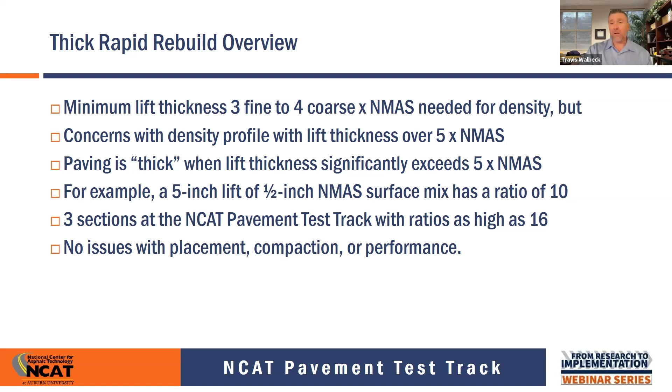Back in 2018, there were 3 sections built on the NCAT test track with ratios as high as 16. South Carolina DOT had come to NCAT wanting to look at this technology and the ability to do thick lift paving. Could they get the density they needed? Could they get the smoothness they needed? We did some different things between diamond grinding and thin lift overlays with them, and put those sections together. Through that work, we found there were really no big issues with the placement or compaction, and definitely not the performance, because they lasted long enough that they continued traffic into the '21 cycle.

So as we look at what was done out there, we had 6 to 8 inches that were placed as a single lift on top of a crushed aggregate base. There was a deep mill and fine mill at intersections.

To simulate what was going on, they used the South Carolina B mix, which is what we used at the NCAT test track here, and we used the local aggregates for that.

We did some trials off the track, certainly trying to see what we could come up with up in the parking lot area, if you've been to the track, to make sure that we were able to get the density and so forth that we needed.

So then a couple of things that were explored were the diamond grinding to make sure we got this new smoothness, and some thin lift overlays.

So we absolutely wanted to put out there that when this was first done, we had a tremendous amount of interest from the other track sponsors that were involved, and we've seen that interest continue to grow.

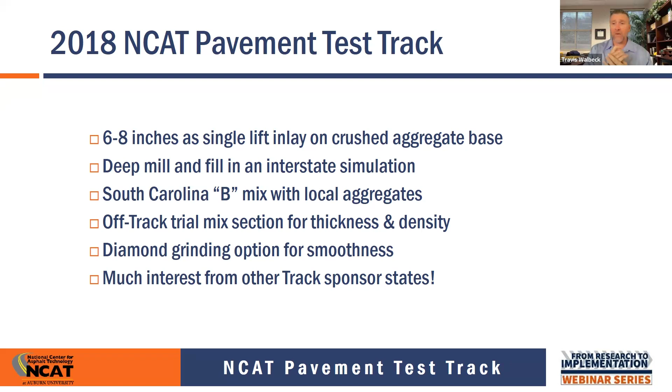I know that Utah picked up on some of those types of things. They tried these types of mixes. Asphalt Institute worked really strongly with them. They've got a ton of fantastic magazine articles out there that I read. I think Howard sent me those 3 or 4 years ago, he was sending me those articles. It was really fun to look at.

If you want to kind of know what the South Carolina B mix was, here's the idea. It was a half-inch mix, that 12.5 nominal maximum aggregate size. They used a 64-22 binder there with 25% RAP, and that would kind of be a half a grade bump for us here in Alabama, because we have that half grade here that we use, which is a PG 67 minus 22. So there is kind of a half a step down using that virgin liquid there.

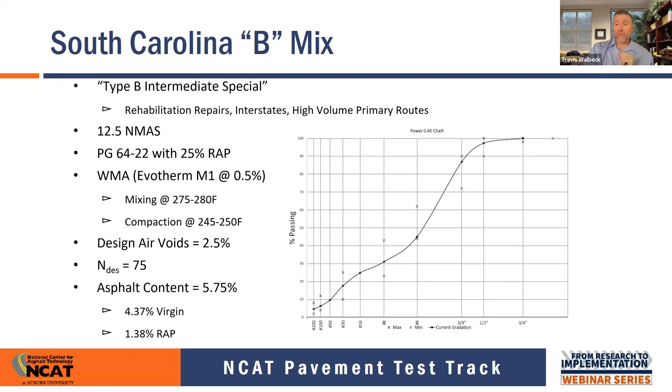There was Evotherm, the warm mix additive, used in that particular mixture. They were designing to 2.5% air voids, and I think when we hear from the Utah guys, they're going to tell us that they're using lower air voids as well. They used a gyration level of 75 on their mixture. The AC content was just shy of 6%. You can see the difference between what came from the virgin liquid there and what was part of the RAP.

So here is some photographs of what was being done on section S9 on the track, which is on our south tangent there. It was full depth rapid rebuild, they called it. It was about an 8-inch lift that was put down in a single pass.

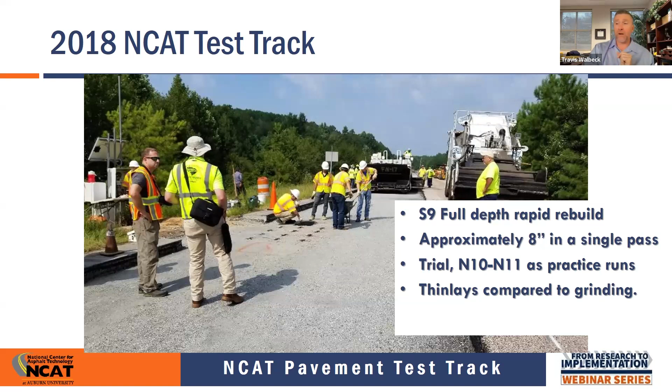Also trials were done on the north side of the track in sections 10 and 11 as practice runs. Really, they did that, but they put thin lays on top of it because they were really wanting to look at the thin lays and how those thin lays performed. But the thin lays definitely compared in smoothness, similar to the grinding that was done on the S9 section.

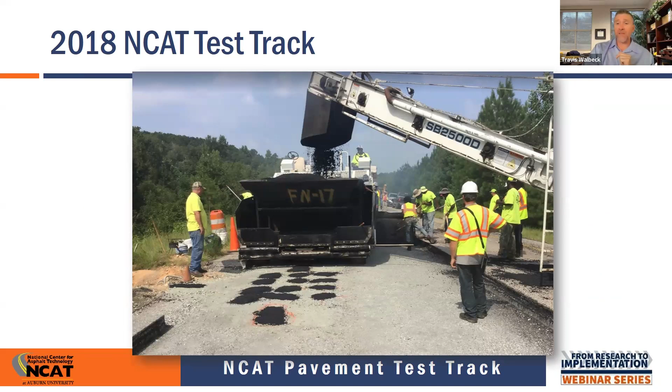So you can see the instrumentation has been placed there. Here's the paving operation. If you look just right to the right side of Jason Nelson's hip there, you can see how deep that milling is, that we are putting that mix down at 8 inches deep at that point.

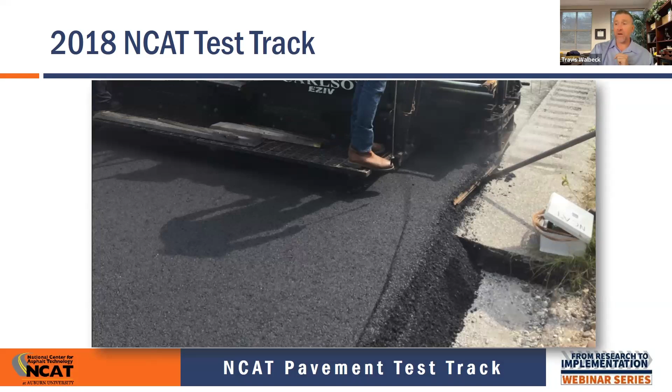You can kind of see here as it comes across the edge where they had to mill the shoulder out to make sure that it drained when we got our rains here. You can see how thick that asphalt was placed.

They did also do some things like wanting to watch the temperature. And I think we're going to hear from the folks in Utah that the temperatures are very important, because we have such a huge mass of material out there that it takes a tremendous amount of time for that to cool down.

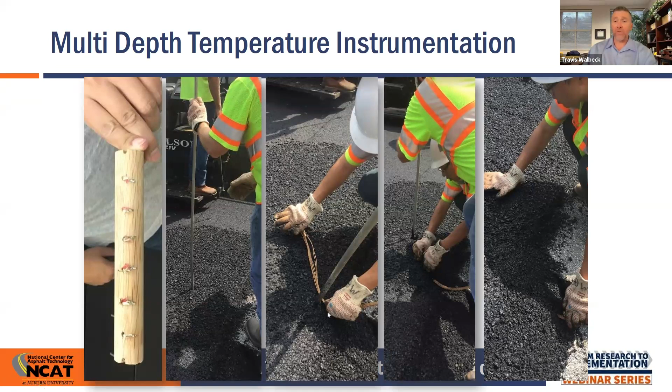So what Dr. Dave Timm did is put together this dowel that you can see on the left side with temperature probes at different levels. And then they crammed a rod down into the mix so that they could embed this temperature probe down in there and monitor the temperature at those different levels to see how the temperatures changed. And they definitely saw differences in the temperatures at the very surface and the bottom that cooled much quicker than the center of that big mass of material.

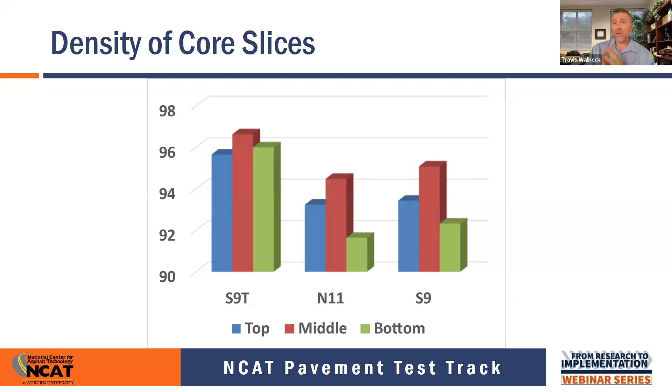So what we've had as this rule of thumb all these years is that you can't get density on the thick lifts. It's kind of been shown that that's not necessarily the case, and it is something that we can do.

So given that little overview of some of the things that South Carolina so graciously sponsored to be done on the NCAT test track, I want to turn the time over to Howard and Dave, and they can tell us about Utah's experience.

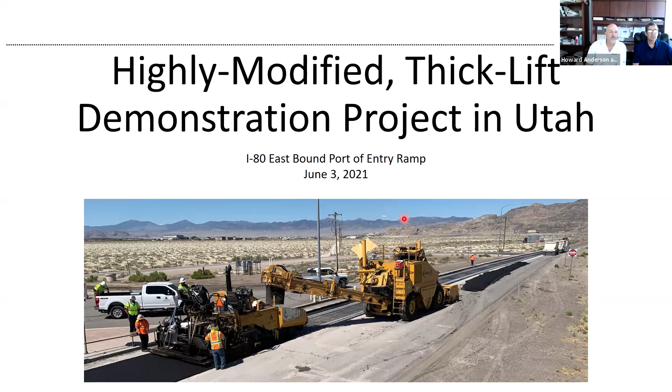All right, so as Howard said, this is the port of entry. We're looking into the state of Nevada from Utah at this particular location. As you can see, this was June of '21, so just a little over 3 years ago. We'll see some of the data coming up in a moment, but we're going to ignore the stuff on the left because Travis just gave a nice summary of it. We want to focus in on the Utah work.

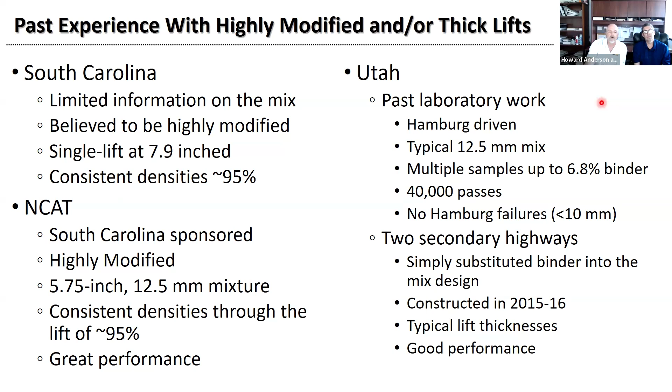And this was not the first work that Utah did. Back in the mid-teens, they started doing some work in the lab, and then in 2015 and 2016, they put down a couple of different sections on some secondary highways utilizing a PG 7634 binder. That was just a simple drop-in, but Utah very heavily relies upon the Hamburg test, and this is a 12.5 millimeter mix. They did samples all the way up to 6.8%, and Howard has a nice slide on that. They really tortured this material, as we'll see, going all the way out to 40,000 passes and a few other things that Howard will talk about. The bottom line is, no matter what they did in terms of combinations of mixtures with this, none of them after 40,000 passes were failing the 10 millimeter criteria that Utah has for their Hamburg.

Very, very quickly, for our PG 7634 binder specification, we spell out the G-star separately at a 1.3. We have the phase angle separately at a maximum of 70. We have an elastic recovery, a minimum of 90. Our high mods are around 98, 99. With that, we do cut the sample immediately, so our numbers are about 5% higher than what you would expect without cutting it within 2 seconds. And then we have our delta TC in there. So it's a fairly standard specification.

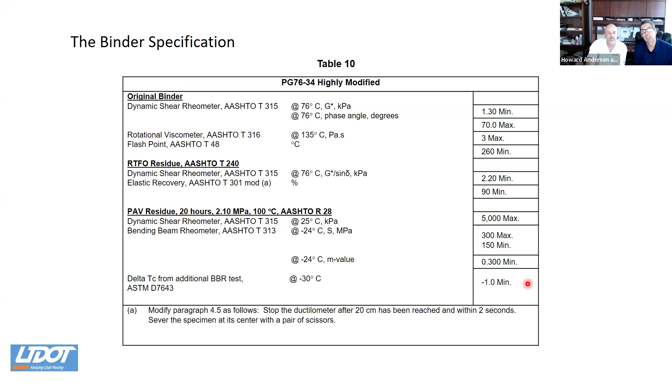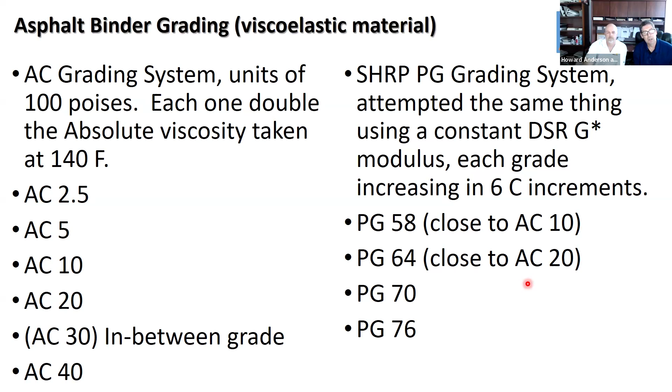This, if you were doing MSCR, would relate to a 64E34 that Montana is looking at doing for their test section. So when you look at our AC grading system of the past, we were basically doubling the absolute viscosity from one grade to the next, a 5 to a 10 to a 20. So when the Superpave grading system came along, they attempted to do the same thing, and a PG 58 to a 64 is similar to an AC 10 to an AC 20. So even though these numbers in the PG system are only going up in 6 degree increments, they are doing the similar thing, and they're doubling the viscosity. So the point to keep in mind is when you go from a 64 to a 70, your G-star is essentially doubling, and when you go from the 70 to a 76, it's doubling again. So our regular HMA has done it at PG 64-34 with our design, our Superpave design. When we go from the 64 to the 76, we now have a modulus, a G-star 4 times that.

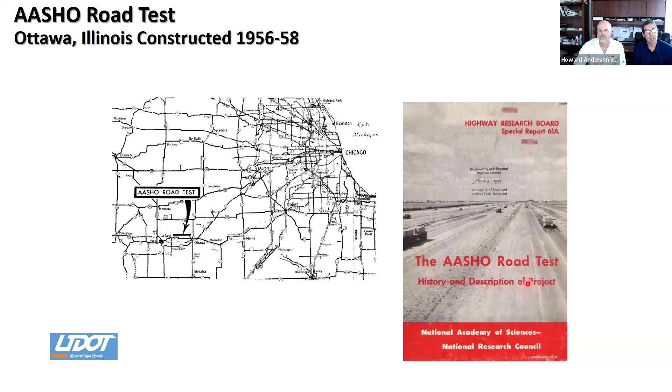If you go back to the AASHO road test in the late 50s, early 60s, our design parameters that utilize 4% air voids were based on neat, unmodified binders, uncrushed aggregates, and rollers and equipment that aren't nearly as good as we have today. So things have changed. With the binders and crushed aggregates we have now, we can change the rules and lower our voids.

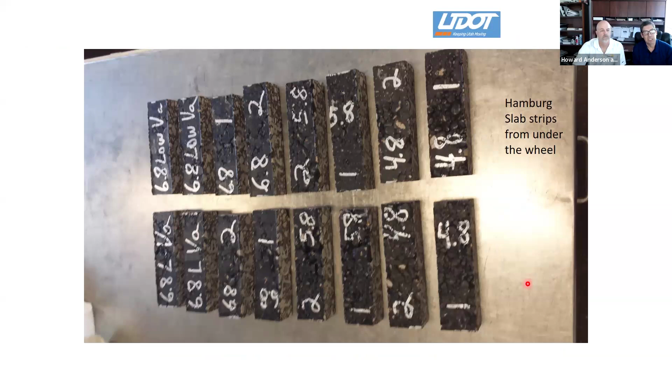What you see here is the bottom of the Hamburg samples where the wheel was passing over. We cut those out separately and ran density tests on them so we could see how much that material continued to compact during the Hamburg testing, up to 40,000 passes with the additional weight.

Here's the slide that really tells the story. On the y-axis, the numbers are either in millimeters of rut or in air voids. If you look at the middle bar, that's the average air voids of the two slabs to begin with. You can see we started out hitting 7%, and as we put more material in and upped the binder content, the voids went down.

The left group here is the Superpave design done at 4.8% asphalt content. We have the first slab here and the first slab here that was run, easily passing. Then we added the 20 extra pounds and ran another test under water at 50 degrees Celsius, and it still easily passed. This little blue line you see here and here shows the densities from those pieces cut out from under the wheel, showing that even as densities came down, we were still stable.

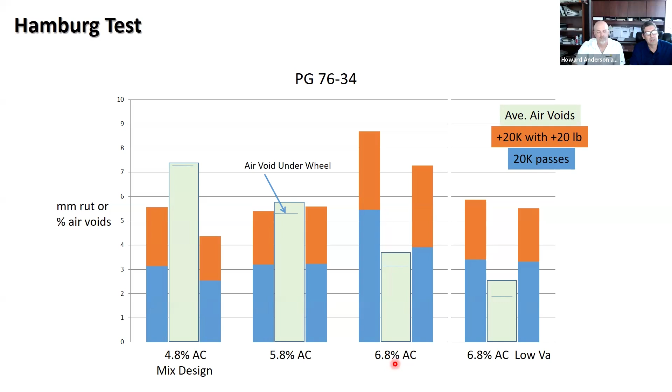Notice that we arbitrarily added 1% and 2% extra asphalt, which is unheard of, right? We're over-asphalting this material, but it's really not sensitive to that, at least in the ranges we're showing. So it basically changes the game. Here's just some of that data for your information.

Jumping out to Wendover—the district engineer in Salt Lake, who I'll credit at the end, Lonnie, was not convinced. He was actually fairly sure this was not going to perform the way it has. So he chose a location he deemed the worst possible scenario within his district in Utah, which took us to that port of entry.

While the ADT is not very high, over half the traffic stream is trucks, so you wind up with between 2 and 2.5 million ESALs per year—based on ESALs, this is a pretty good traffic location. Add to that, this is a very hot summer location with temperatures easily exceeding 100 degrees multiple days throughout the summer. For comparison, if you were doing 98% reliability using standard software, this location is looking for a 64-28. So we're moving in both directions outside of normal reliability.

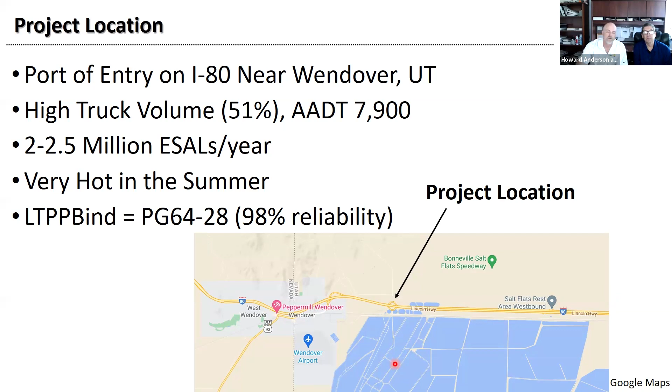Very widespread. The specifics of this particular project: a mill and inlay, milling out 6 inches of existing PCC, so in essence they were building in a bathtub. It's only about 330 tons of material. It's that highly modified material, the 76 minus 34, a dense graded 12.5 millimeter mix, very much on the fine side. They were also looking at constructing this in one lift.

The question that's been raised all the way back into the early 70s in New York, up to today, is why bother with two passes if we can get away with one? We'll see in this presentation that there are some concerns with a single pass—it's not a panacea. Also note, this was a 2-hour one-way haul from the Beck Street plant we've mentioned out to Wendover.

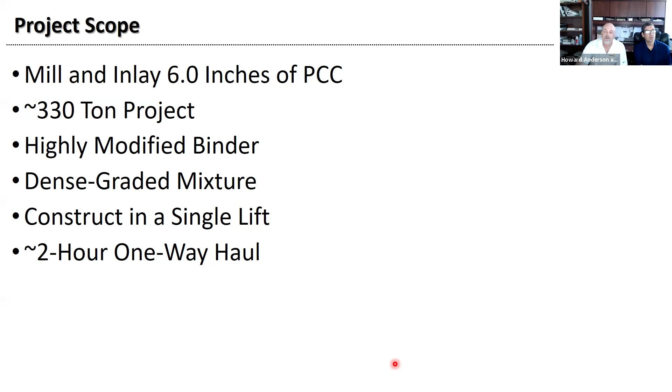We'll look at a few of these things in another slide, particularly on the Hamburg. But for right now, a couple of things to point out: this is a 50 gyration mix, 12.5 millimeter as mentioned, and it's 100% crushed quarried material.

The material had 15% RAP, and we can see the breakdown between the virgin and RAP binders. So there is some contribution from the RAP, but it's principally this highly modified material. At 50 gyrations, it was a 1% air void mix. When you take that out to the normal gyration level that Utah DOT utilizes, it's essentially a 0 air void mix. The VMA requirement was bumped by Howard for this particular operation, and Luke Peterson's design came in at 15.3% and 93.3% on the VMA and VFA respectively.

They did a drain down test because there was concern that, being such a rich mix, they might have issues with that. That portion of the specification is actually going away now, because they haven't had any issues with it.

They also ran a 40,000 pass Hamburg test on this. Instead of adding extra weight, they simulated the weight with temperature, going from 50 to 54 degrees C on the second 20,000 passes. Even after 40,000 passes, it was just a little over 6 millimeters. Those slabs were targeted to 4% design instead of the normal 7% you would typically see.

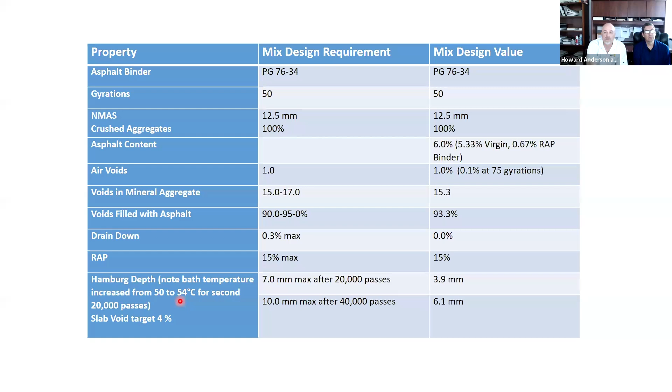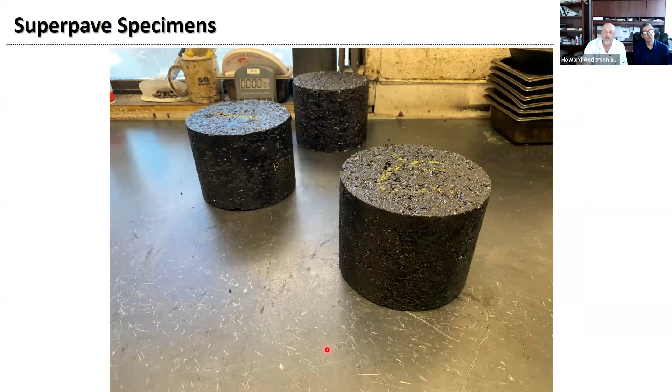Looking at some specimens that came out of Luke's lab when he was still with Staker, these are just sitting on the table. As you can see, it looks like a fine graded mix that's on the rich side. Nothing outstanding in terms of the pucks—they don't look that much different.

Howard: Okay, thank you Dave. So one of the questions that has come up: if you go really dense, do you have enough room for the asphalt to simply expand within the mix if the temperature goes up? That's easy to check.

You have your standard volume tables in ASTM that show how much the asphalt will change, and I chose to look at it from 25 Celsius up to 60 Celsius. Basically, when you go through the numbers and let that binder swell between those two temperatures, if you start with a 13% effective binder volume, it only swells to 0.29 more—at most just a few tenths. So if your in-place voids are 1% or more, you have plenty of room for the asphalt to swell based on temperature.

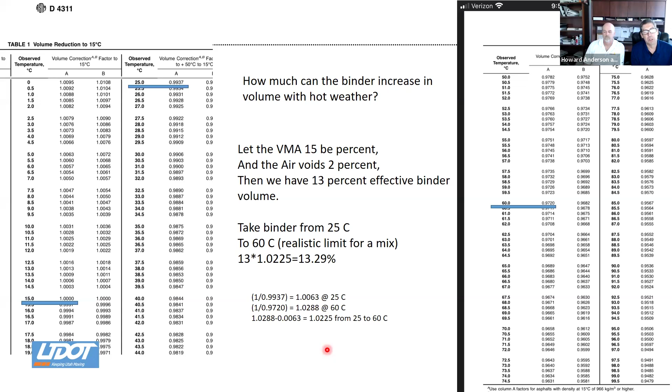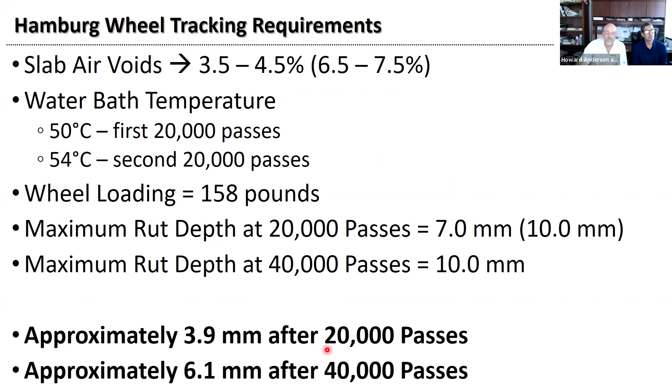I said we had another slide, and I have to apologize and move through this more quickly because I did cover a bit of this on the last slide. But what we really wanted to highlight is the fact that this mixture did not display any trouble passing the Hamburg test.

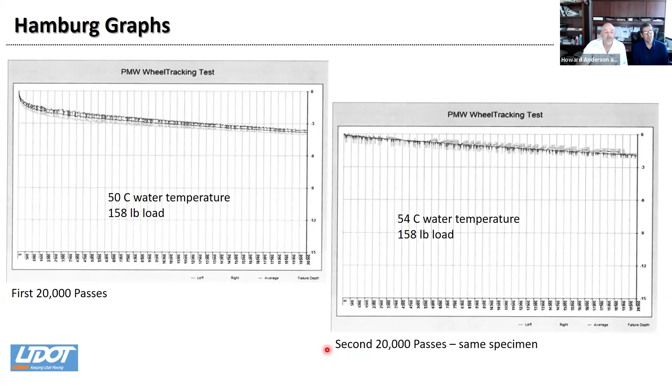As an example, here are the graphs that produced the data we just saw—the first 20,000 passes, and then I shifted the second one to try to match them up. You can see it's a very linear graph; we're not seeing a stripping inflection point of any sort. We're simply, quite frankly, rolling along under the Hamburg. I'd say the mix is kind of sleeping because it's not doing much, which is extremely good.

Staker Parsons had a great deal of concern and caution about putting this stuff down in a single lift with no experience doing so. So Luke and his crew at the time decided it would be best to put down a test strip.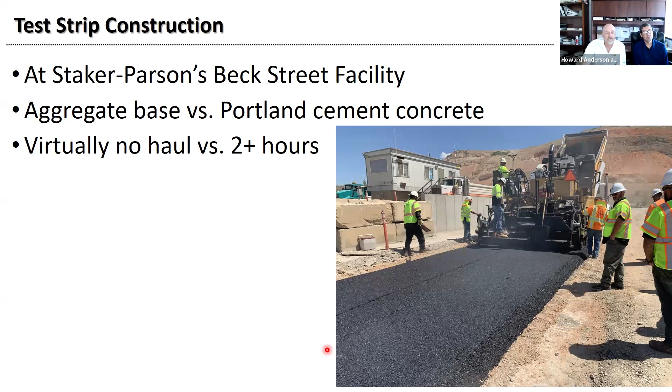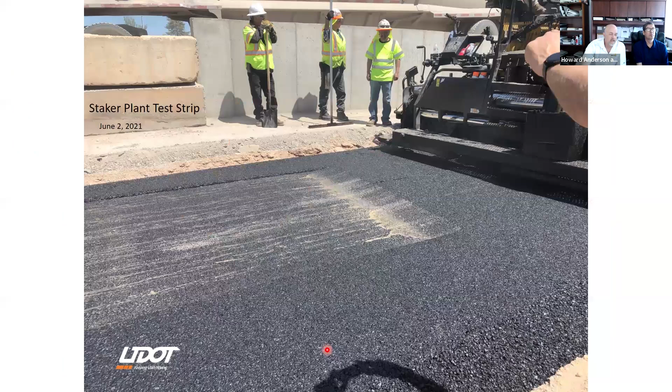They were utilizing standard construction equipment and methodology, just a typical double vibratory Hamm roller. You can see that this mix is showing a significant amount of stability.

I have to apologize, unfortunately I didn't get a picture of when the roller was off to the side, but it was extremely stable. We did not see this mix walking out under that vibratory roller, even when the roller operator had it hanging over around 6 inches.

It started out at 7.5 inches, with your typical 25% roll down. When you're shooting for 6 inches of compacted thickness, that meant it was coming out behind the screed at about 7.5 inches.

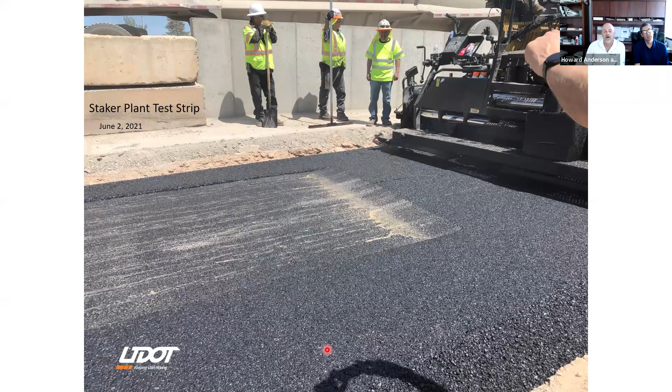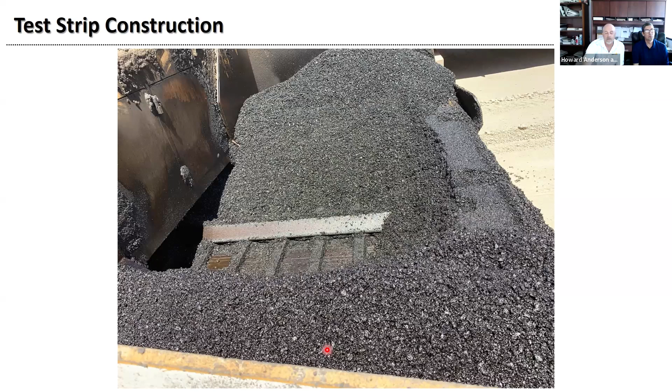The one issue that they ran into and learned from in this test strip, as you may imagine, the volume of material running through that paver is higher than you normally see. So they were struggling to get enough material into the paver to get it through at the test strip.

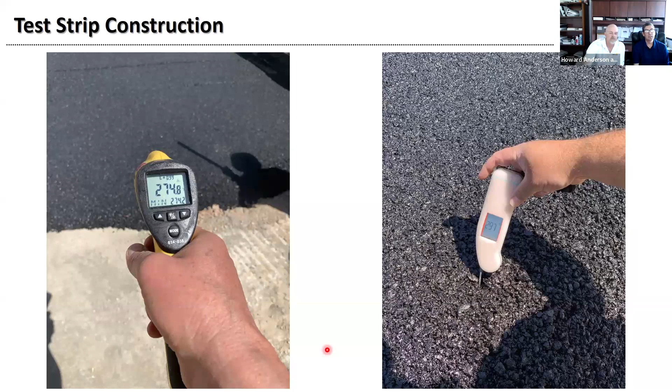Temperatures were very good. You can see the surface is about 275, and since it was produced at 300 with no haul, not surprisingly we're pretty close to that temperature in the midst of the mat.

Some great lessons were learned. First of all, density was easily achieved. It was just 5 passes for breakdown with that Hamm roller we were seeing. There was no intermediate roller; they simply finished with that same roller when it was all said and done.

The feeding of that large volume was achieved, but they had to make some alterations to their process to get that. Very important to note that the stability of this mix was exceptional. Even with 7.5 inches of uncompacted mix coming out behind the screed, that heavy vibratory roller was not walking out like you might expect with a mixture that did not have side support.

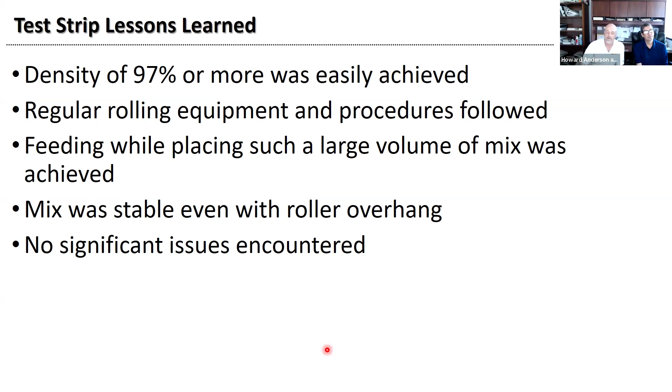No real significant issues were encountered, which took us out to Wendover the next morning.

As was mentioned already by Travis, this mix takes a long time to cool down, and we'll see a graph on that. I bring that up because there was some concern - the mix in that test strip was still rather warm that next morning, and it did display some of the behavior you might expect from a warm binder-laden mix at this stage. So there was some concern that maybe we shouldn't run out to Wendover yet and give this a little more time to cool off and show its ultimate stability.

The decision was made not to do that, with Howard's leadership, and so we were out to Wendover.

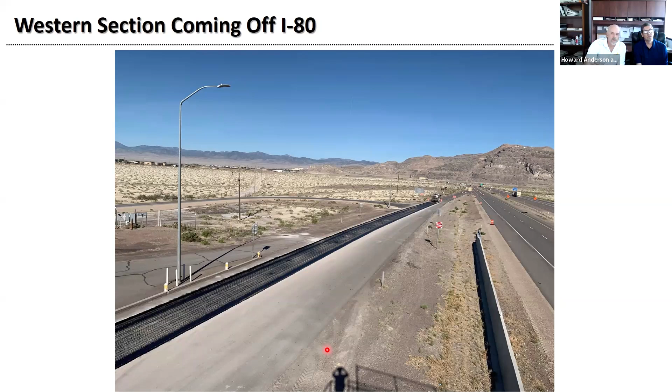This again is looking in Nevada. Here's on the other side, the post scale. I have to point out, as a tack coat guy, I'm not real pleased with the tack coat, but that gets mentioned every time - my friends at Staker are probably sick and tired of me mentioning that.

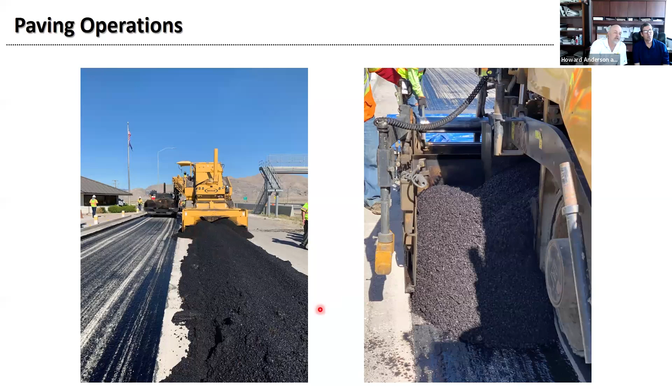Look how thick the ribbon is. And the windrow itself, look at this - the shuttle buggy is barely wide enough to pick up this material. Notice how it's flowing out to the side gates on the feed of the Weiler shuttle buggy, and the mix was filling up the hopper. They did a much better job of keeping this material fed properly from the lessons they learned.

As you would expect with a 2-hour one-way haul, there was a bit of drop in temperature of about 25 degrees. Same roller equipment that we saw before - they had 2 rollers out there, one essentially there for backup.

The Staker Parsons crew was very cognizant of not wanting anything to go awry. In fact, they did have an issue with one of the shuttle buggies that was a downstream result of a truck that ran into a tire problem. So they wound up having to bring a secondary shuttle buggy that they had on site into the stream, which worked out very well.

Here is that cooling curve. Luke put a probe at the bottom of this material, just a single probe. You can still go out there today, and the last time I checked it was still functioning just fine. This material takes a long time to cool off.

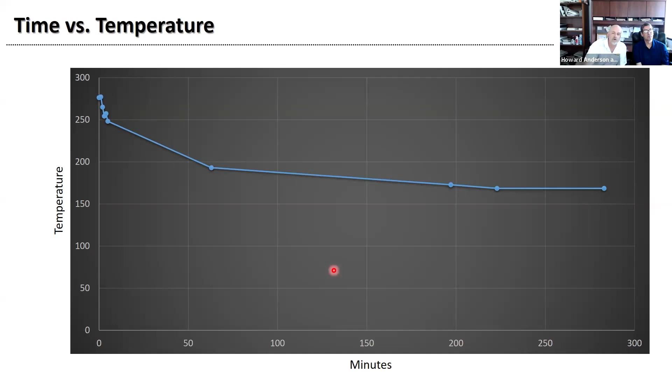Just like Travis had mentioned, when you have 6 inches of compacted material, that's a lot of mass. The Pave Cool or multi-cool software was employed to simulate this, and it tracked very closely to the actual results we saw with the in-place temperature probe. Densities were very easy to achieve.

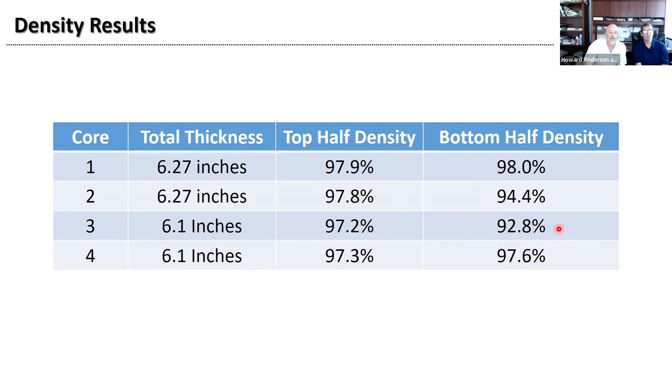We really like to focus on this top half. Utah is a PWL state, and Howard and his team were holding Staker to the top half. So they took these cores, cut them in half, and measured the density both top and bottom, and it was very consistent at the top. We have a little bit of inconsistency with the lowest density just under 93%. These two here are in the rough area where we had that issue with the truck, so there was a bit of delay, and as you might expect, that has a negative effect on density. But at the surface, they maintain a very high quality density, very consistent density.

We then have a post-construction picture 5 months later. I was out there in October of last year, and this material is showing no distress whatsoever. I really like to point out there's a lot of traffic. This is the off-ramp going back to I-80, and the truck queue stretched from here, here's the scale, all the way back to I-80. You could not put another truck in there without them resting and waiting on the shoulder to enter the scale. So gobs of traffic.

What have we learned? Well, we learned that highly modified asphalt can be successfully constructed in a thick lift, even with a 2-hour haul. Very high densities were achieved, and as we'll see with some of the other projects done at different thicknesses, that has been very consistent throughout the state of Utah. To date, there's over 4 million, probably approaching 5 million trucks that have now been over this in the last 3 years. There's no discernible movement, no cracking, zero distress.

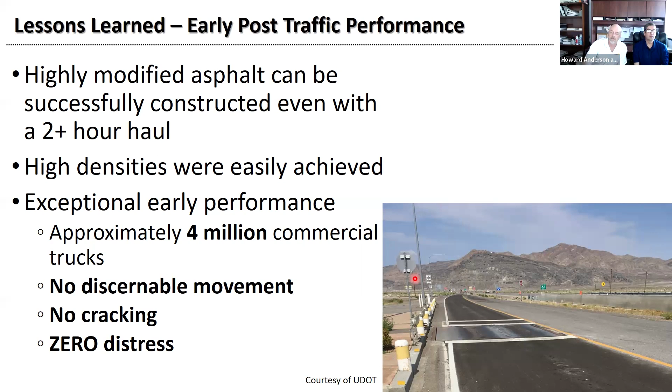As you go ahead, Howard. I would add to that, go back to the picture with all the trucks, you can see the material is not bleeding. Some people felt that the material would bleed, but actually the high binder content wears off of the surface. It has worn off the surface, and it's looking like a regular asphalt surface out there with regular friction numbers. Excellent point, and that was one of the concerns.

We have a fine mix with a lot of asphalt. The question was raised, what about friction? Well, at the port of entry with very slow and stopped vehicles, that's really not an issue. But we want to use this on mainline. So they went out there with the British pendulum, and as you can see, skid is not an issue.

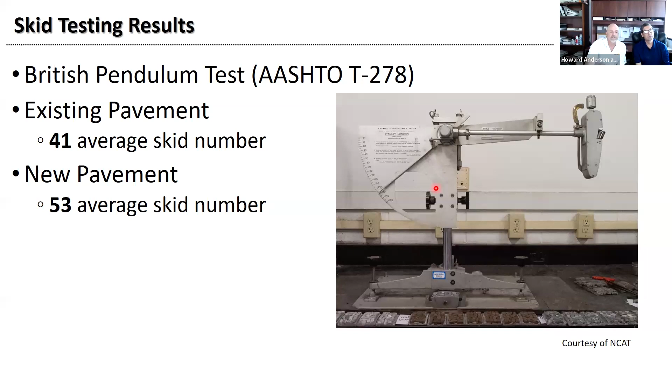Okay, cost considerations. This was a small project, 330 tons. We expected the cost to be high, because it's an experimental feature, 150 a ton. We were thrilled with that, actually, and the costs have significantly dropped from that number.

The second bullet there, we compare to SMA, which the state of Utah uses as the workhorse mix on our interstates and state routes. We understand that the SMA, because it's a gap graded gradation, is going to be more expensive than the high mod, being a regular dense graded mixture. The binder contents for the high mod are close to or similar to the SMA, but the binder is a little bit higher quality, actually 2 grades higher. Our SMA has a 7028, the high mod is a 7634.

Two grades better. There's no mineral filler needed, no fibers to add. There's less QC and QA testing with the high mod versus the SMA, and the production can be higher when you're in a thick lift application. We've noticed that the cost for our high polymer binder, our 7634, has dropped significantly. And we also do not require a 7% polymer content - our specification to meet it does not require that much polymer.

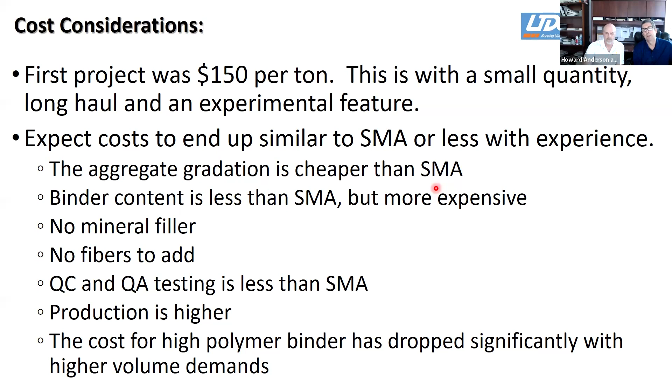We also understand that it's a potential savings for our contractor. Our industry has been very excited about getting into using this material for the potential to pave something once instead of twice. They can increase their production. Savings in traffic control costs, it makes sense to put the money into the pavement itself and to try to

minimize those other costs with traffic control. User costs or delay are reduced if you're having a shorter time period to produce the pavement. There's no tack coat needed. And I think this is a big one, as we understand that tack is very important to the strength of the pavement. And that pavement is even that much stronger when there's a perfect bond all the way through and everything is in one lift.

And with the higher binder contents, we have a more durable pavement. So essentially, the high mod binder allows us to increase the binder content. That alone increases the durability. So it's increased the durability because of the higher binder content, and also the binder is a higher quality.

And we also know that now we have a real potential to expand our paving season. And a note on that, one of the future projects that is in contract now, and Staker Parsons happens to be the contractor that was awarded it, is going to likely have some sections that are going to be 7 inches in compacted thickness. And their discussion of them possibly getting to that this year.

And because of the thicker material, they're going to take, if they do that, they're going to take advantage of the fact that they can still have a workable material at a lower temperature than what you might expect under normal circumstances. And so for those of you that are in a part of the country or part of the world where you're not concerned with late or early season paving, you can pave 12 months out of the year. If you do happen to get a cold day, you just simply wait, and 24 hours later, 48 hours later, you're back in business. That's not the case in so much of the upper reaches of the country.

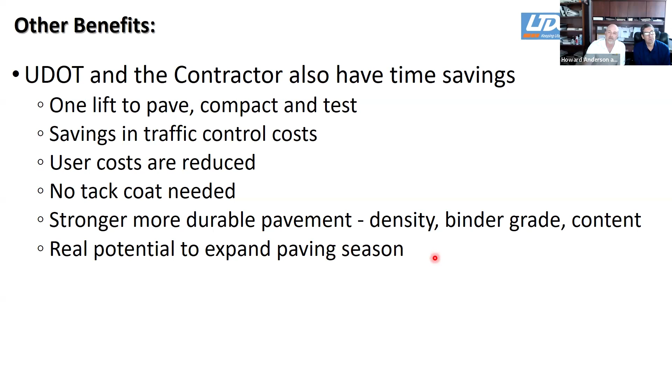So maintenance of traffic, cool down time is expected to be longer if you're in a thick lift situation, unless you're in cooler weather. The edge will be thicker, so that would need to be protected for traffic. Shorter construction time may be safer for the workers and the public. Smoothness, we have one less opportunity to improve the ride, but the contractor pays attention to that, and everything's magnified when you're in a thicker situation.

But if you keep the constant speed with the paver and the material being delivered to the hopper, you'll be just fine. And the other thing that we have learned is that the higher density material can be ground, and it looks like concrete when you grind it. You're not opening it to water.

And I just want to piggyback onto Howard's comments. When it comes to paver operations, this is one of the potential downfalls, negatives, if you will, with thick lift paving. The paving crew has to be on their game. Every little mistake that they make, adjustments in paver speeds, coming to a stop, not filling the augers properly, whatever else you may want to incorporate into this list. Every single one of those, the consequences will be magnified with the thicker lift.

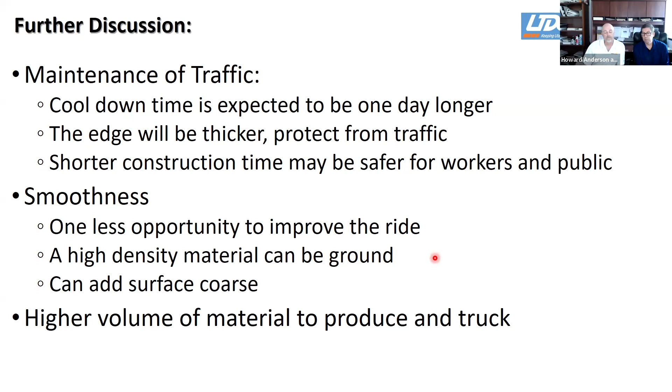Another section that was done also by Staker Parsons the following year, there's a section of concrete that has reached the end of its life on I-15 north of Salt Lake City. If you're familiar with it, near Lagoon Amusement Park. And that was a section that was scheduled for removal and replacement, or crack and seat, excuse me, it was crack and seat. And Lonnie, the materials engineer from Salt Lake City, once again said, hey, let's look at this. This might be an option for us. And so they laid 3 inches of this material in May of 22.

Again, they got great densities. As you can see, the thickness was very close to the target of 3 inches. The average binder was very close to the minimum of 6%, and the VMA again was very respectable, as you would need to, of 15.7.

To date, there has been very good performance on that. We just traveled over that section yesterday, in fact, and I will point out that the production of this was coincident to Luke Peterson, our last speaker's final days with Staker Parson.

Yes, and I would add a little correction there. It was Jason Simmons, our statewide pavement design engineer. Thank you. Yes, made this good call and to put it there.

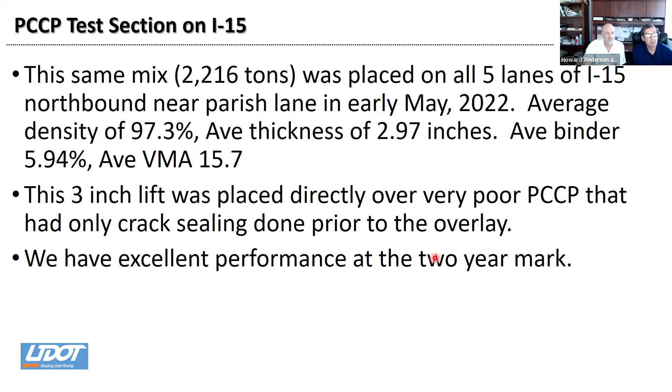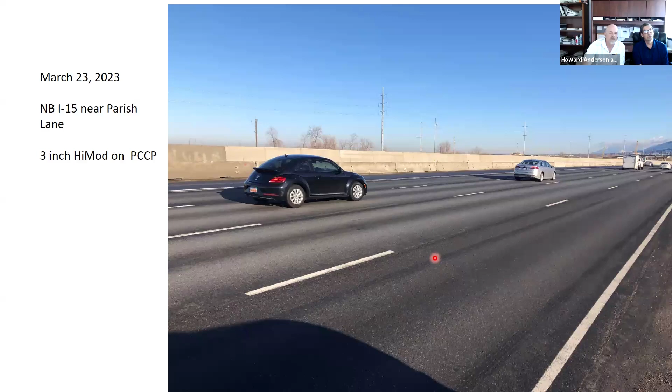But continue on. These are just some pictures of the site. You can see the beginning of it in the northbound lane, which is the only lane that received it. Excellent pavement, no distresses. It is a little over almost a year old at this stage in these pictures. So not a whole lot to see.

Go ahead, Howard. Okay, and that's been down 2 years now, and it has since had SMA put on it. So this slide here shows the installations that occurred last year with this exact same mix, basically a 1% air void mix, 6% binder minimum content, 1% voids at 50 gyrations. And they've all compacted to very good density numbers with excellent performance.

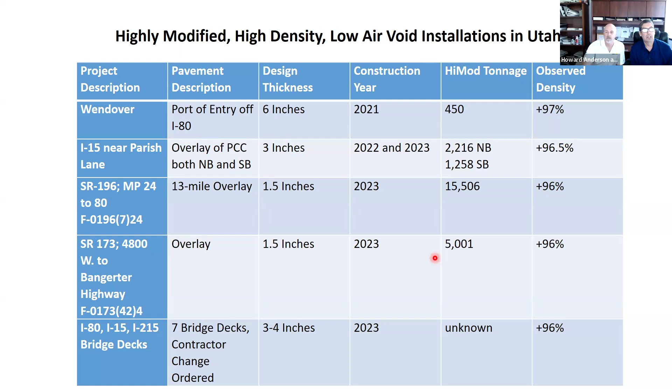So the next one. So I mentioned that we did some testing at the Asphalt Institute, some beam fatigue testing. I have to point out this was very limited. This material came from Granite Construction, one of the 3 contractors in Utah that have experience with this material now. And we didn't have the luxury of a full array of testing, but we do have some pretty interesting information.

The graph here shows a single test with a control mixture that also came from Granite, utilizing a typical 64-34 super pave mix designed to 4% air voids and such, comparing it to this highly modified 1% air void design. The specimens for testing were at 7% for the 64-34 and 4% air for the 76-34.

And the thing that we find astounding, and I got a table next that's going to show you all of the different tests, notice the difference between these two. You're going to find that failure on this one occurred just a little over 12,000 passes, and this is about 1.1 million passes.

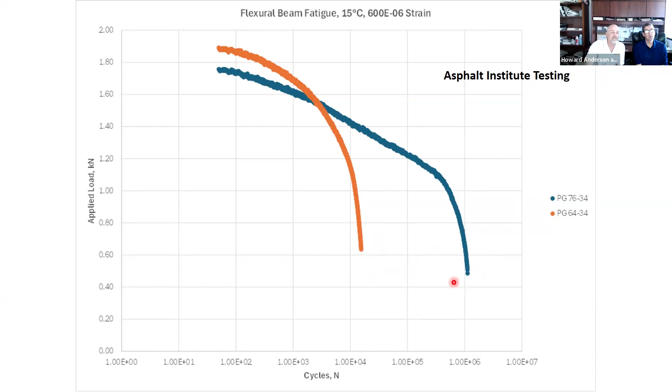And so you have about a 73 times number of pass gap between these two at the same microstrain. This is the table I was talking about that came out of our lab.

Your 64-34s here at top, again at 7% air voids, very close to that in the slabs that were produced. A 4% target was seen here. Notice that the microstrain levels are not exactly the same across the testing. We do have 3 that do match up perfectly at the 475 to 600 microstrains between the two.

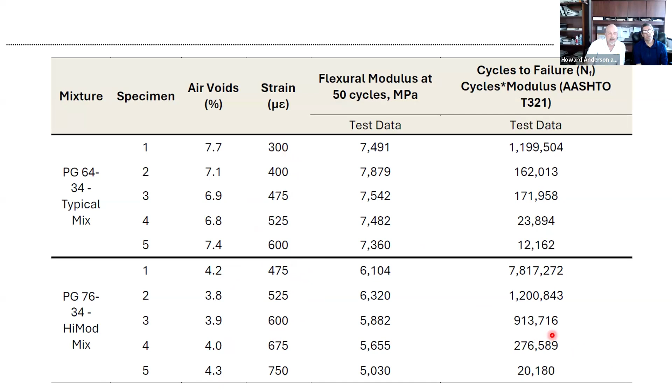And again, notice the big shift that we're seeing in the failure between those specimens, simply with lower air void design, high asphalt content, very robust binder.

Thank you, Dave. So what we have here is some limited testing with our ideal CT. This is where Utah is going in the direction of to use that test. We see that we're getting very good numbers, typically over 400. And if you look at the far right column, that's done at 7% voids.

However, this mix never sees 7% voids in the field. 7% is the target normally done because you have an installed density of maybe 93. When you have an installed density of 96 or better, it doesn't make sense to test it at 7% anymore. And so that's why our Hamburg slabs are being tested at 4%, and we're looking at ideal CT testing, moving from the 7 to the 4, although we haven't done it yet.

But you can see when you do lower the voids in the ideal CT, as we've seen and heard from other folks, that the numbers do drop, but they're still very good.

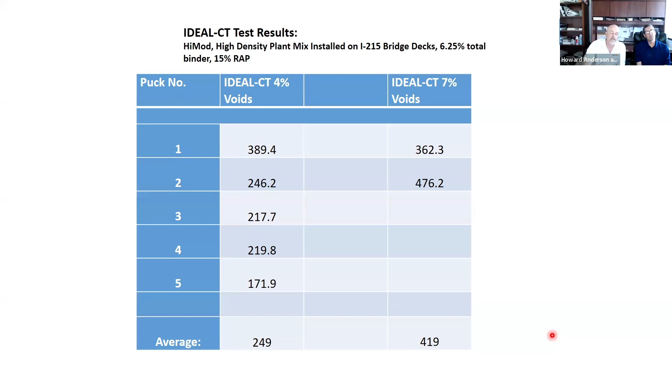And I'll just point out that neither us nor at the Asphalt Institute or UDOT have the capability of doing the Texas overlay test. And we think that just this week we found an opportunity to get some Texas overlay testing done on this, as well as a comparison to a control mix, again with the 64-34 from the same binder sourcing entity, as well as the same aggregate pit. So stay tuned. We should see some of those numbers in the future.

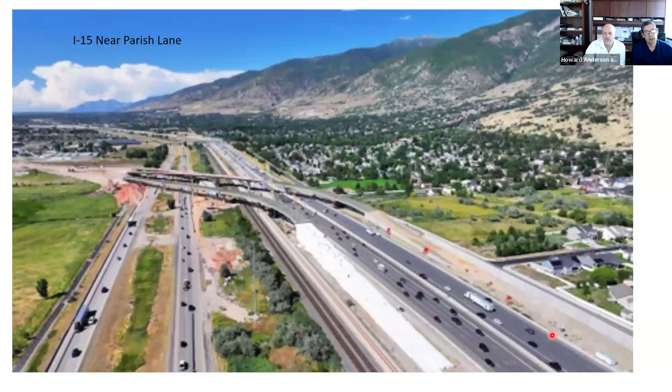Okay, so what you're seeing here is one of the projects that won an award. This is the one that we talked about up by Lagoon. It's just a high level shot of it. Go ahead into the next one.

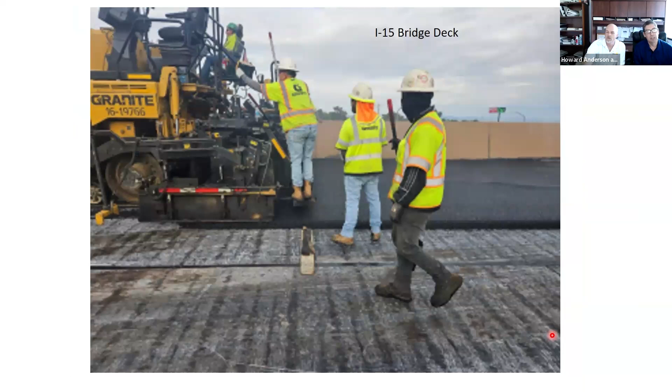Lessons learned: a density of 97% is easy to achieve, and we are seeing no rutting, and we expect no rutting based on our rut test results. Regular rolling equipment and procedures are used, with no changes needed there.

Feeding while placing such a large volume of mix was achieved, although you have to pay attention to having the trucks there to get the material. The mix is stable and workable, with no unusual issues at all.

Thin lift projects are being used the most right now because that's the most work that we have going on. And bridge decks are just taking off. We have bridge decks all over our state that are being used with this.

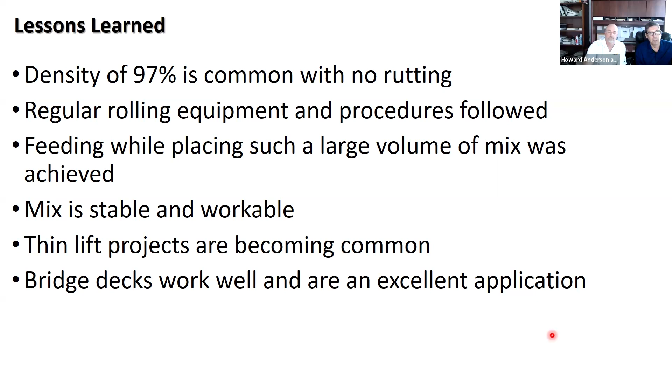In 2024, Utah has really exploded, you might say, in their usage, as we're going to see in the subsequent slide, with over 500,000 tons of contract that went out this year, including one project that is over 200,000 tons alone.

Howard mentioned a little bit about the costs. We can see that the range is from just over $100 a ton at 103 to about $140 a ton, and that's very reflective of the haul distance. That's why we're seeing a notable difference depending on how close the project is to the hot plant.

In District 2, where Lonnie is, in 2025, 90% of their asphalt tonnage is going to be the highly modified, low air void mixes, east and west, roughly in the Salt Lake City area. The most ardent advocate for additional PCC in the state of Utah is now flipping projects from PCC to this material, and as Howard has mentioned, there's been exceptional performance so far.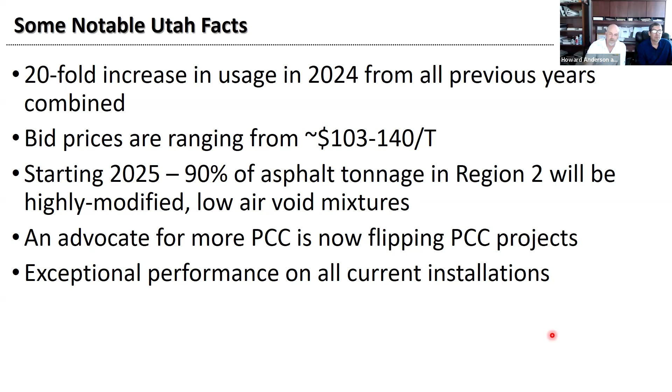There's been zero noted issues with any of these materials. This is just a short list of those projects. The number here has now reached above 500,000 tons, and there is a 200,000 ton project that's in southern Utah.

We also have some SMA projects that are changing to the high mod, such as this one on US 89 and State Route 204 to 134. So what we're seeing is that perhaps we could call it the older top-performing surface material, SMAs, is starting to be supplanted by this material for a couple of different reasons.

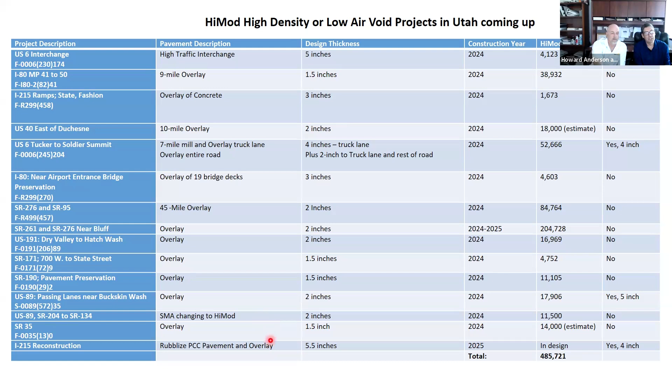One, the performance has been exceptionally good with this material as we've seen so far. Two, the cost is less. And three, the contractors prefer to work with this material over the SMAs. You could say it's more sustainable as far as allowing RAP, where our SMA doesn't allow RAP, and the contractors love it because they can use all of the aggregates as they crush the pile down. They don't have to have the mineral filler and the mineral fibers.

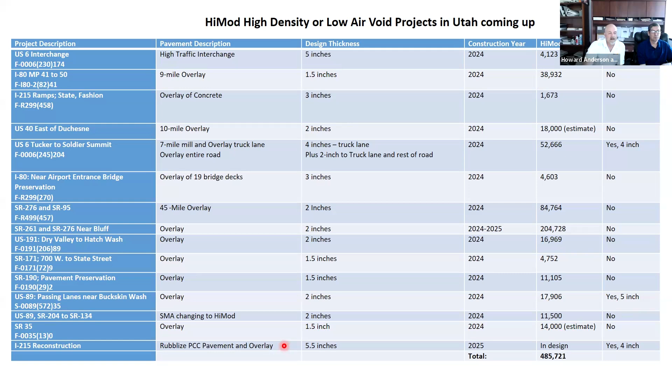Just to move through this quickly as well, this is the project at the bottom here that was scheduled for removal and replacement with PCC of an existing PCC pavement. In 2025, that is going to be rubbleized, and a total of 5.5 inches, 1.5 inches to level, and then a 4-inch surface is going to go on it.

So we want to acknowledge Lonnie Merchant. We've mentioned him a couple of times. He deserves a significant amount of credit for his willingness to try this material, and in my opinion, more importantly, his recognition of the quality and the performance of this material. We keep mentioning somebody who was a big proponent for PCC—well, now you know who that is. That's Lonnie. And he is the one who made the decision to not do the removal and replacement with the PCC that is going to get rubbleized.

Clark Allen in the Central Labs has done a significant amount of work, and none of this would have been possible without the incredible partnership that exists between UDOT and the Utah Asphalt Paving Association, which is made up of the binder suppliers and contractors. I can't say enough about the quality of that.

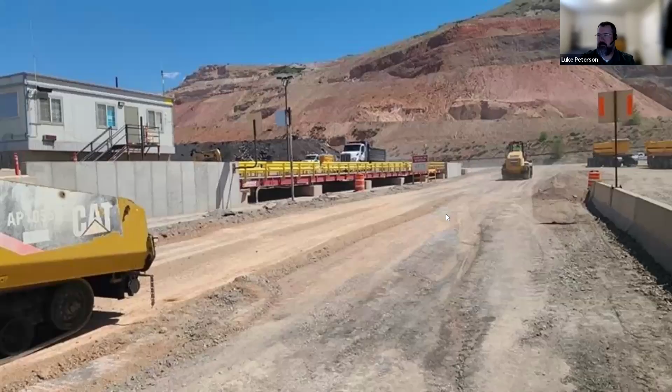So as we got into it, we started going through it, and once we got into it—yeah, like I said, we wanted to do this test strip. This is the test strip section that we had honestly graded out with a grader the morning before, and then started paving it. I'd gone to my upper management at Staker Parson and expressed my concerns about a mix that we'd never done.

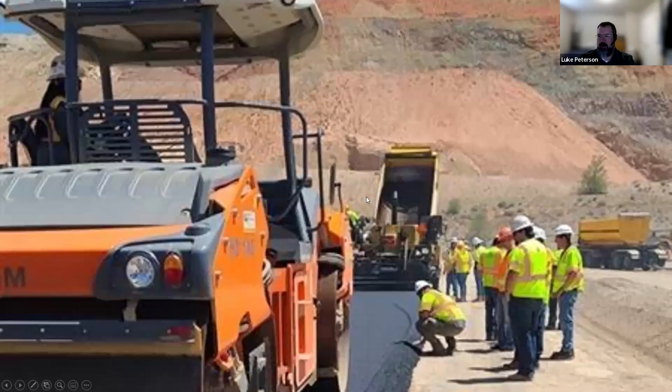I knew there was going to be more than just our paving crew sitting out on the job site for this first thing. There was starting to build quite a bit of recognition. So we wanted to make sure we were doing our best. We ended up paving 100 tons in our yard, and that's not a typical paving crew amount of people. So everyone wanted to show up and be a part of this and see what it would do.

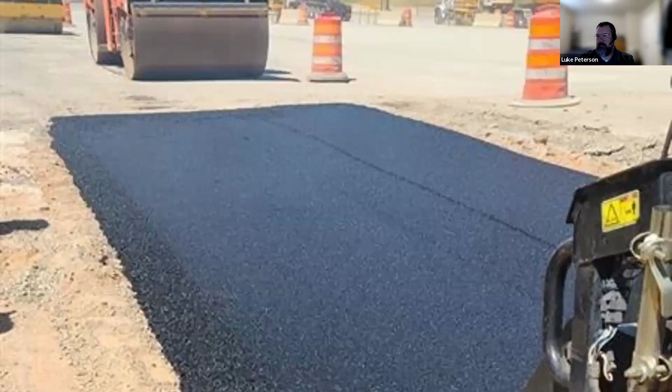So we got going into it. Like I said, we put down about 7.5 inches, rolled it out, and then it went from there.

So that takes us back to the test strip, or actually out to the project. This was paved with double bellies, which run roughly 42 tons at a time in a windrow, and then needs to be picked up with a pickup machine and placed in the paver. We ended up placing the material on the side of the project because it was so deep. We didn't run trucks in and out of the project, so we put the windrows next to the paving section and then picked it up.

What ended up happening is we tried to pick up way too much windrow at first, and we did end up plugging a shuttle buggy. For any of those that deal with shuttle buggies, they're a little temperamental - if you look at them wrong, they'll pretty much break. So you've got to be careful on what you're doing. We had another shuttle buggy on site that we were able to bring in and continue paving. It was about 8 trucks. All the mix was loaded and sent on its way before the first truck ever got to the job site.

So yeah, we paved out the whole entire thing - it's only 300 ton, roughly 100 ton on one side of the scale and 100 or 200 ton on the other side. Once we got done, we got the rollers on it. We were concerned about how much rolling compaction it would take, but the test strip that we were able to core helped us figure out what our rolling pattern needed to be. We were able to correlate gauges and do that kind of stuff - we had never had a gauge on this mix. So that test strip really helped us, that we could have confidence in our gauges as we were getting density on the job.

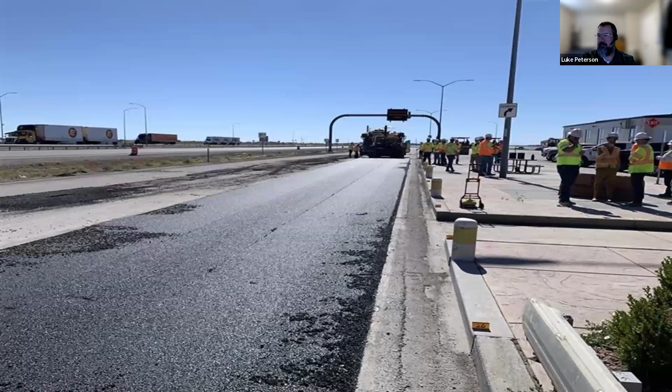So like I said, it was a big thing. There was a lot of different people out there, a lot of pressure. We had paved out the test strip that night, and the guy that had cored it phoned me at my house. He said, I'm putting footprints in the job - everywhere I'm walking, I'm still seeing where I can walk. So I ended up driving back out to our pit that night.

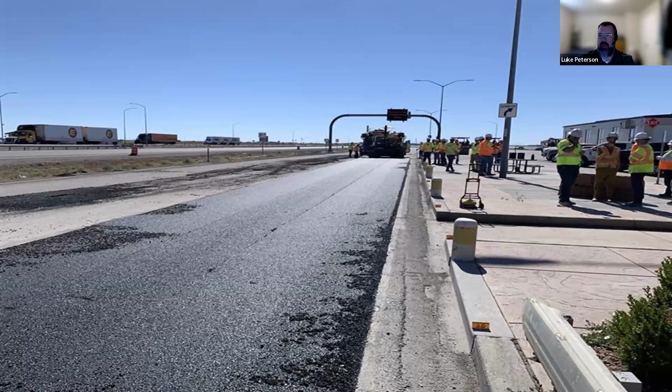Looking at it, I did not get a whole lot of sleep that night. I sat there and we kind of thought about it. I waited till 5 a.m., till when I could dare make the first phone call, and called Lonnie and Howard and got on the phone and said, hey, I think we have some real concerns - this mix does not seem like it's cooling down enough. The original plan was to put traffic immediately back onto this pavement. So thank goodness, with their calming me down and helping us talk through this, they said, great, we'll leave it closed for roughly 24 hours so it can cool down all the way before we put traffic onto it. We were able to talk through that - again, it's that communication part of talking through it together.

So hopefully this video will play. Sorry, it's loud. But yeah, this is the project itself.

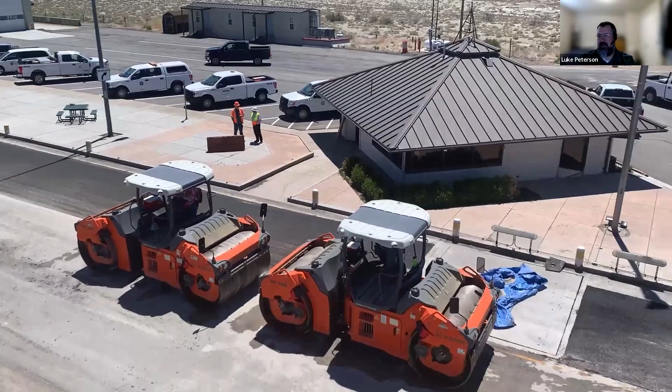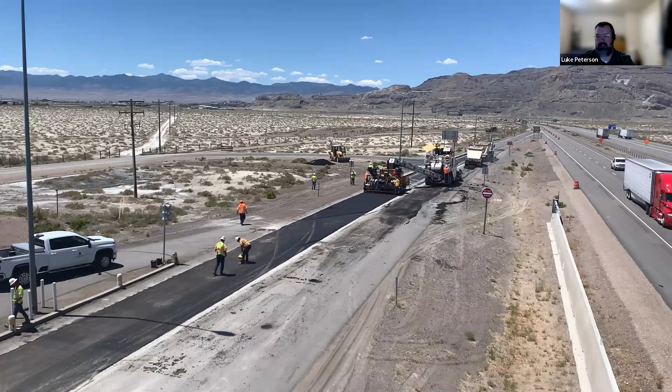Again, not a very big project to start, but what it's done so far in the state of Utah has been huge. I'm grateful that I've been able to be a part of the first one down. There are a lot of contractors in Utah and around that have done a lot more mix now, and they've done a great job with it.

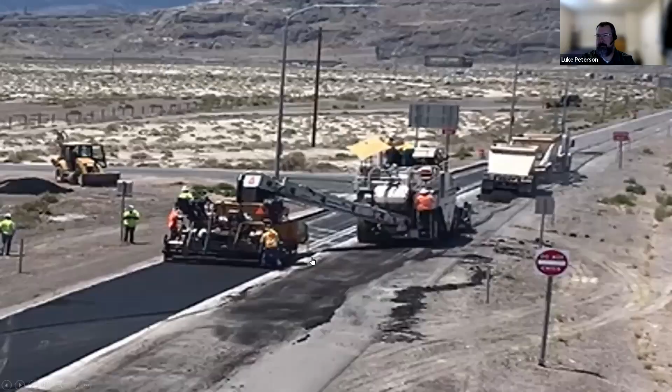Yeah, so the biggest thing is, as the contractor, the communication piece, especially with your paving crews, with your hot plants, making sure that stuff goes through, talking to the DOT so everyone expects what's going to be done, and going from there. So that was my piece as a contractor, being very nervous going into it. It's a mix that a lot of contractors are very familiar with now and have a lot of great confidence in. So that's what I have.

Any questions? Just one piece I'll add, Luke. There's understandable concern, as Travis mentioned at the beginning, with getting density when you get to some magical thickness, I'll call it. The reality is that when you go with thicker pavements, they are exceedingly easy to get density on, and there's a couple of easily explainable reasons for that. One, with all that room, the aggregate has a gob of room to move around. One of the things we do in compaction is reorient aggregate, and with that thick lift, it's free to do that.

Without it being impinged by a relatively thin ribbon. The other thing to keep in mind is that at our paving temperatures, the asphalt binder is a hydraulic fluid, and hydraulic fluids transmit energy at nearly 100% efficiency. So with a vibratory or oscillatory or whatever style of roller, the energy it's imparting into that pavement is very effectively moved through it, affecting good compaction top to bottom. So there's understandable concern about thick lifts, but in practice those concerns don't pan out in general.

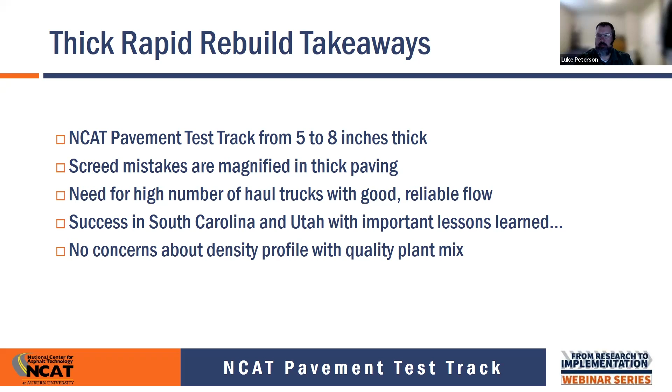So given that, if you want to see anything else on the NCAT side of what was done, the two reports that you can find on our website, which is ncat.us, from the 2018 and 2021 cycles, are going to both have discussions on the South Carolina thick lift paving sections that were done.